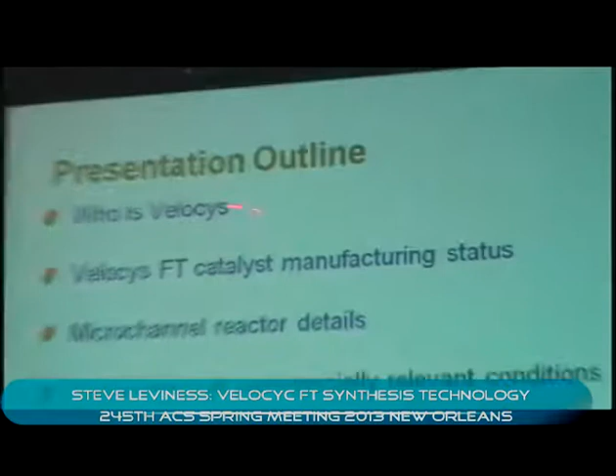On the outline, I'd like to talk about who Velocys is. There's been some confusion about who we are and what we do. I'm going to turn the presentation kind of backwards from the way it often goes and talk about our FT catalyst manufacturing status up front. A little bit on the microchannel reactor details, although again here I'm going to focus on the catalyst. Quite a bit of information about performance at commercially relevant conditions and performance scale-up, and some data and discussion of catalyst regeneration and poisoning, and finish with the catalyst composition and manufacturing.

At that point, I was going to apologize that I will not be able to show any detailed characterization data, which we do have, but I was not allowed to show it. However, after this morning, I would just have to say that my friends at Sasol and Exxon have already shown that data. So thank you very much. Yeah, got me out of that line.

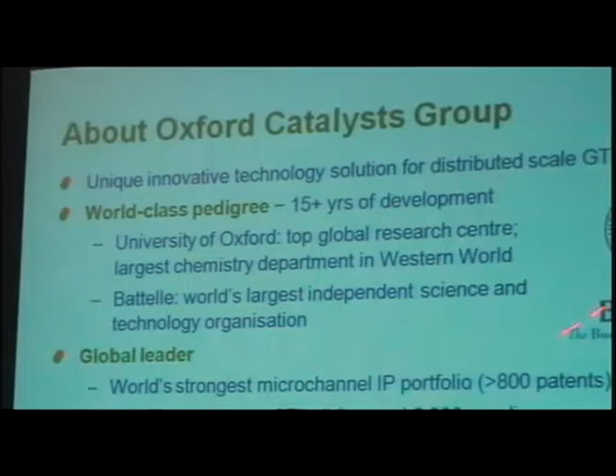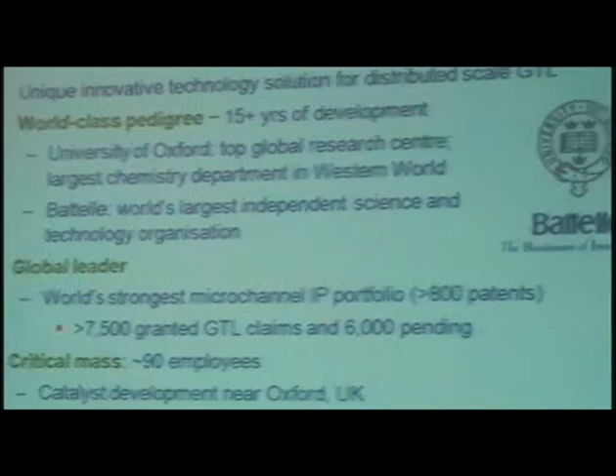Okay, Oxford Catalyst Group. It's really two companies originally. Oxford Catalyst was spun out of Malcolm Green's lab at the University of Oxford, which is the top global research center, the largest chemistry department in the West. Velocys was spun out of Battelle in the Pacific Northwest National Labs. Battelle is the world's largest independent science and technology organization. The catalyst technology came from Oxford, the microchannel reactors from Battelle. We have a tremendous amount of IP in microchannels, showing 7,500 granted claims, 6,000 pending. I'm still trying to get us to update how many of those are independent claims. As you know, there can be claim inflation, but we have a lot.

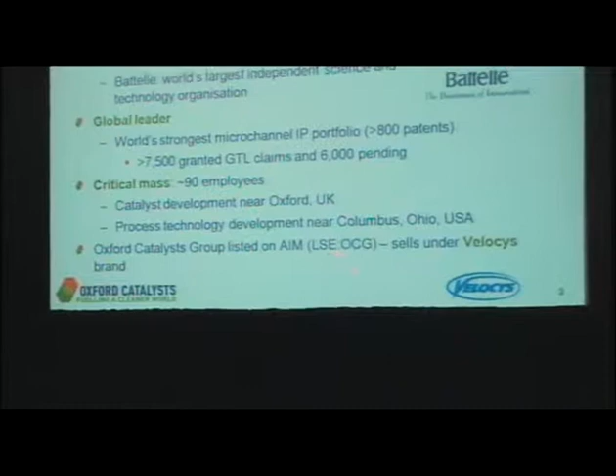We've got about 90 employees now. Our catalyst development group is still in the UK near Oxford, and the majority of our employees are near Columbus, Ohio, which is a pretty silly place to be when you're in the energy industry, but that is where Battelle's headquarters is, so that's how we got there. We are listed on the London AIM market as Oxford Catalyst Group, OCG, although most of our publicity and announcements are under the Velocys brand, and we are actually consolidating the name to Velocys a little later this year.

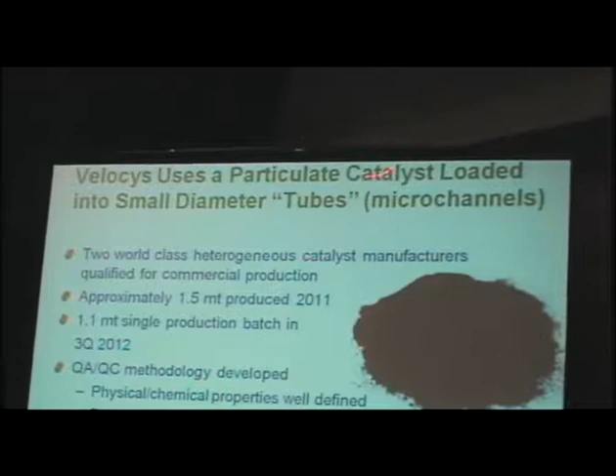Okay, so the catalyst. There's been a little confusion because we've changed over the years, but this is what it is. It is a particulate catalyst. It's a powder. It's bigger than a slurry catalyst particle distribution. It's smaller than a standard fixed bed catalyst. And it is directly loaded into small diameter column tubes, microchannels.

Typical screens on the top and bottom, catalyst stays in the reactor, but it's also very easy to change out, quite a bit handier than wall coatings and issues like that.

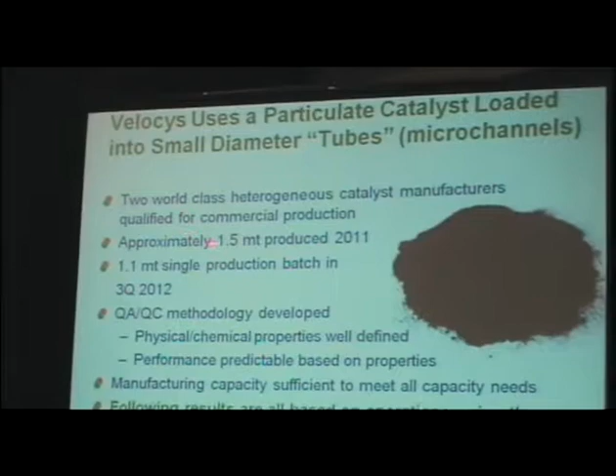We have two world-class catalyst manufacturers qualified for manufacture. One made about 1.5 metric tons in 2011, and the other made a single 1.1 metric ton batch last year. We've developed QA/QC, defined physical chemical properties, and can predict performance based on property and characterization measurements.

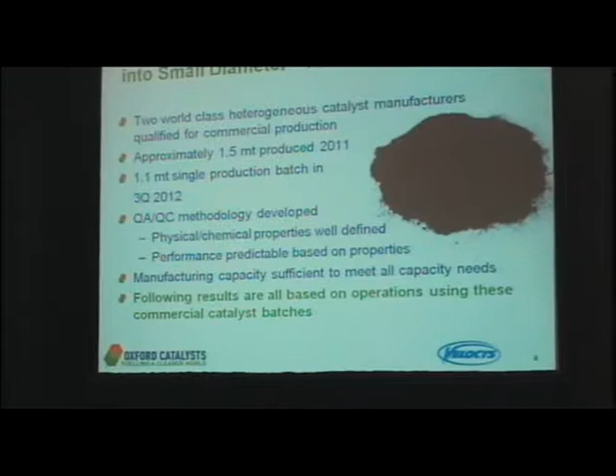That capacity now is sufficient to meet all the needs we've looked at for potential commercial plants. Importantly, the results I'm going to talk about here are all based on operations using these commercial catalysts. This isn't a one-off in the lab or anything like that. So, Sue, to get to your point from earlier, yes, they can be manufactured, though you may have to go through a few rounds of scale-up to get over issues and concerns.

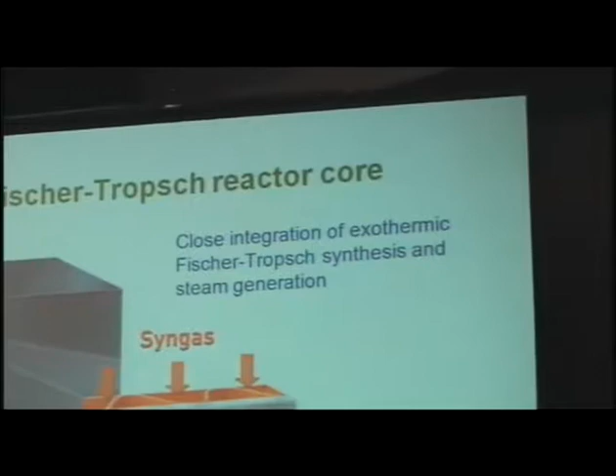Okay, the reactor - this is what we call the reactor core, with alternating plates. There is a coolant plate, cross flow, and that is boiler feed water, and we are generating steam. Downflow, there are gaps that the catalyst is poured into. So syngas flows down, coolant flows across.

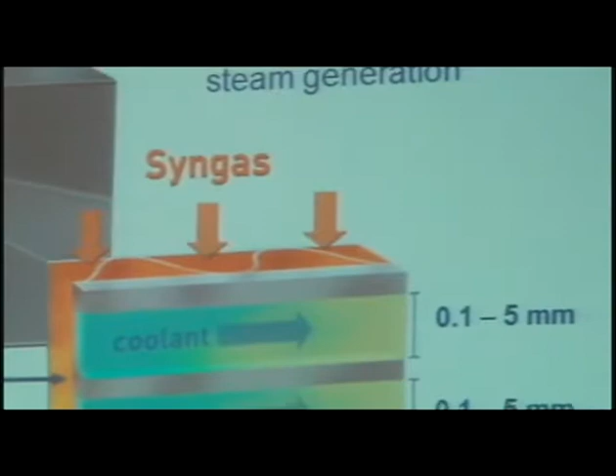Characteristic dimensions are in the range of 0.1 to 5 millimeters. The smaller end is on the coolant side. The process side is a little larger.

Here are some reactors. This is a half barrel a day. It's actually about the size of a pizza box. It's inside a pressure containment shell that we ran with a client in Austria in 2010.

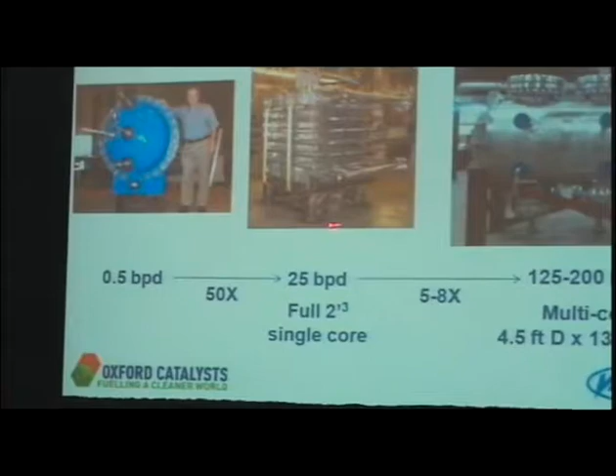This is a 2-foot cube core with a pressure housing around it. That's nominally about 25 barrels a day. And to put it in perspective, that 2-foot cube core at normal operating temperatures will generate between 400 and 500 kilowatts, almost half a megawatt of energy release as steam.

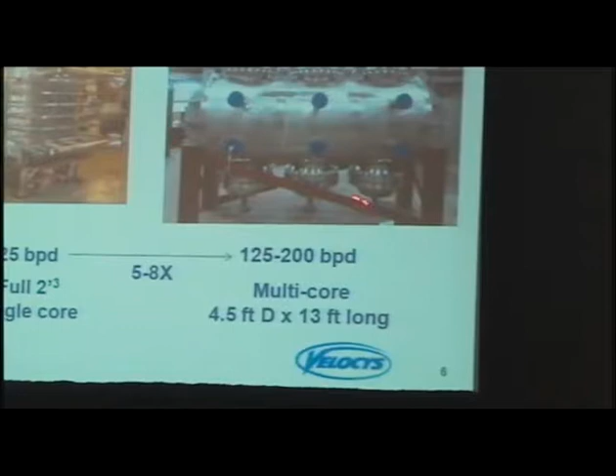This reactor here is a larger one. It's just stacked larger inside a cylindrical pressure containment vessel. This would normally be about 150 barrels a day at standard conditions. It's 4.5 feet in diameter and 13 feet long. I've had a 150 barrel a day reactor in my career before that I climbed inside and was lowered down on ropes, so it's a little different concept.

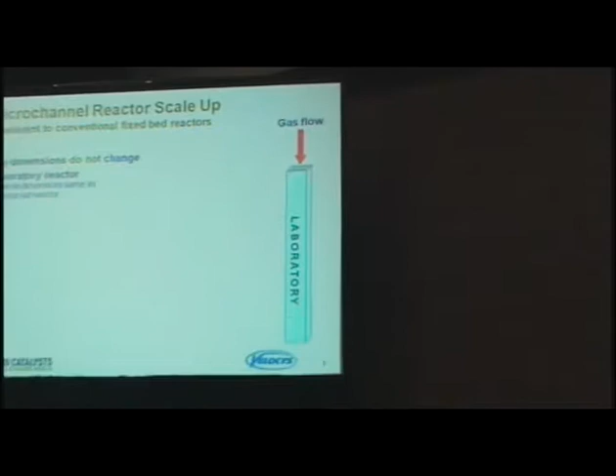So for scale up, this looks very much like a traditional or conventional multi-tubular fixed bed system. The key dimensions don't change. In the lab, we run single microchannels that are the full length - 24 inches long, with exactly the same dimensions as the microchannels in the reactor.

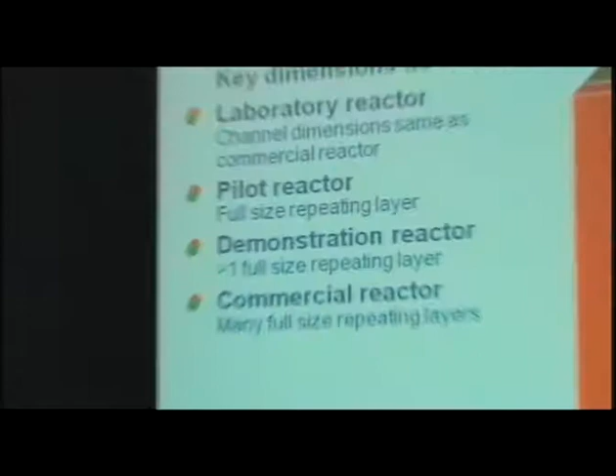We go to a pilot reactor, we add more of them across a single plate. We go to a demonstration reactor, we have more plates. And for a commercial reactor, just even more. But the concept is exactly the same as a conventional fixed bed - gas distribution by pressure drop, and just increasing the number of tubes.

All the parts are the same. The micro-macro interface ensures consistent results at these different scales - it's simply numbering up.

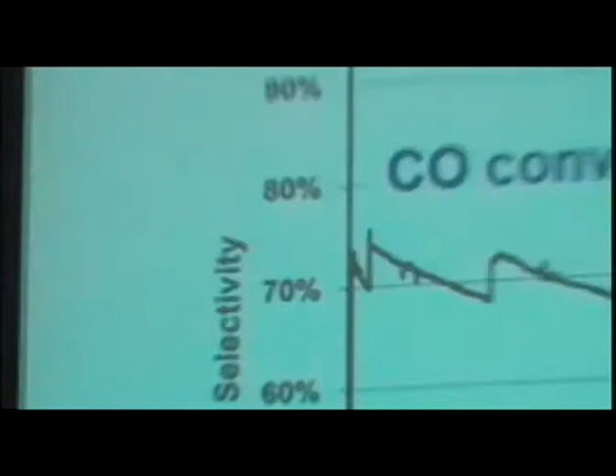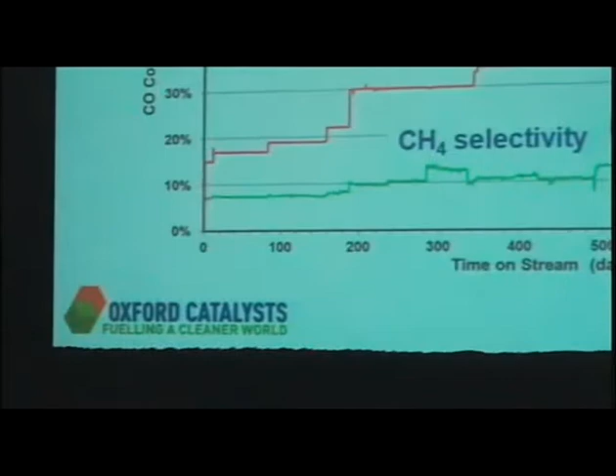All right, this particular graph - I showed an earlier version of this about a year ago. Some of you were there at the Syngas conference in South Africa. This is CO conversion here at the top, reactor temperatures in red, and methane selectivity in green. This is very similar to the data Kim was showing, except again, I have the numbers on mine. We're increasing temperature to hold conversion more or less steady, and we were doing a lot of product collection and analysis at each of these periods.

One important note - if you see right here, there's kind of a plummet in conversion and then a sharp rise in temperature. We had a trap failure in the lab. People often talk about clean cylinder gas - well, if you have 3,500 pound CO, it's not clean when it comes into your facility, and if your trap fails, you get carbonyls. So over on the bottom here, this is time on stream, and this is in days - not hours.

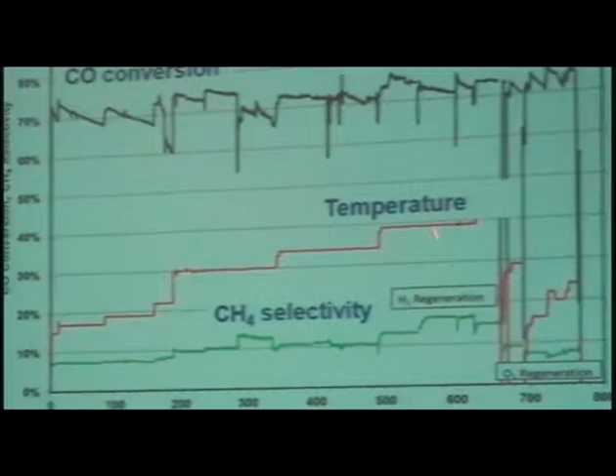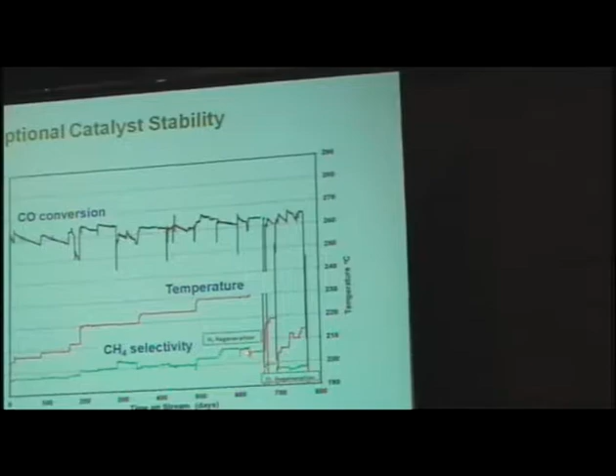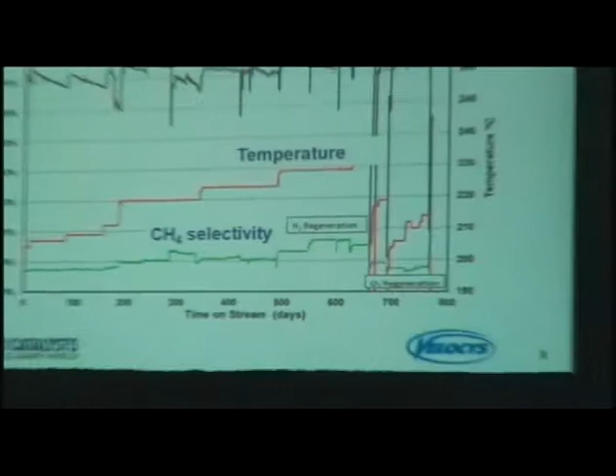Late last year, we did a hydrogen re-reduction, and typically that will recover about half of your activity. We heard some discussion of that this morning. A little while later, we did a full redox, a standard wax removal, oxidation, re-reduction. I'll show you the data, but we actually came back at a slightly higher activity here two years later than when we first started this up in January 2011.

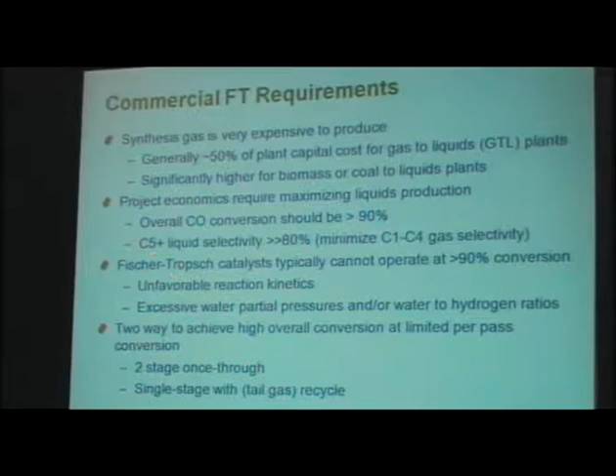One thing about this kind of data is it's not economic. You can't just run a single stage at 70% conversion - it's kind of meaningless because your syngas plant or XTL plant would never be economic. Syngas is really expensive to produce, generally about 50% of plant capital for gas-to-liquid plants, and it can be a lot more for coal or bio. So project economics require maximum liquid production, typically overall CO conversion more than 90%, and C5 plus liquids minimum 80, but should be quite a bit higher, which means you want to minimize light gas selectivity.

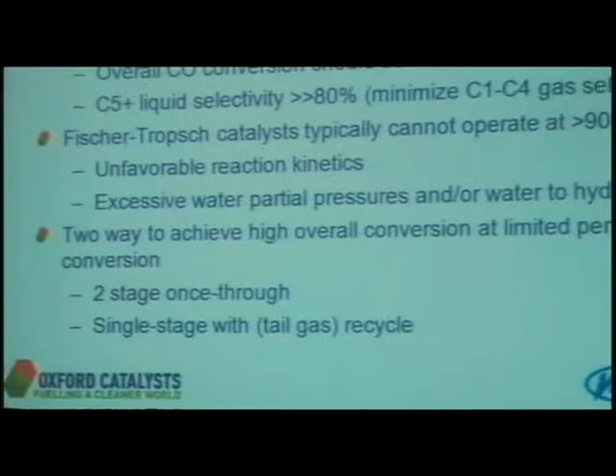I think we all know that just about zero cobalt-based FT catalysts can run at over 90% conversion. There's kinetic issues with getting there, and there's also activity maintenance issues with staying there. So there are two ways to do it. Kim mentioned these earlier - you can run a two-stage or even three-stage system through, or a single stage with tail gas recycle.

Just to look at those briefly: syngas in an FT reactor, you've got a couple coolers, 3-phase separators. You may or may not recompress here. Then you go to another second stage FT reactor, cool down, knock out product again. Then you have a tail gas purge from the FT unit that will typically go to a combination of fuel and some recycle to syngas generation like an ATR or SMR.

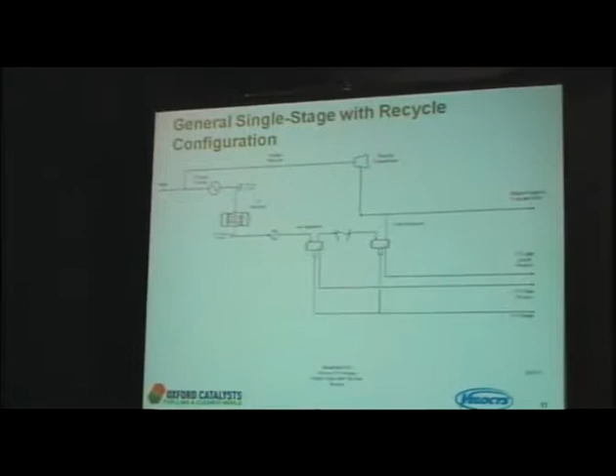Single stage with recycle is just what it sounds like. You have an FT reactor, some separation, and then when the tail gas comes off, a significant fraction of that is recycled back to the feed. It's a way of achieving high overall conversion on fresh syngas while limiting the per pass conversion in the reactor. Typically when you're at relatively low inerts, certainly below about 20-25% non-hydrogen CO, usually the single stage with recycle will be the more economic choice.

Just a couple details there. The recycle ratio is really set by the difference between your per pass and your overall conversion. So here I'm targeting 91.5%. If we can run 74% per pass, which is our current design, we have a recycle to fresh feed ratio of a little bit over 0.4, and about 30% inerts on feed, starting with a standard 10% inert ATR kind of gas. If we could only run 60% conversion per pass, we'd have a recycle to fresh feed ratio higher than 1, and we'd have almost 40% inerts on feed. That's just the way it works.

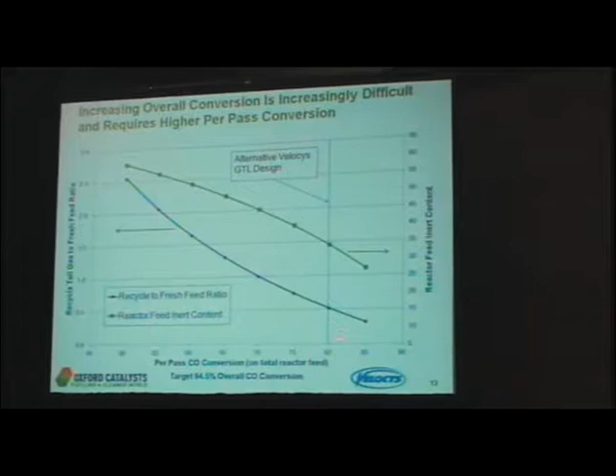And if we try to go to even higher conversion, in this case 94.5, similar kind of thing. Now, we've looked at a design with 80% per pass conversion, and there we need a 0.5 recycle ratio and 35% inerts. But if you could only run at 60%, you'd have over 1.5 parts of recycled tail gas to feed. What that does is it backs feed out of your reactor, and you need more reactors. So there's a significant economic implication of the per pass conversion you can operate at.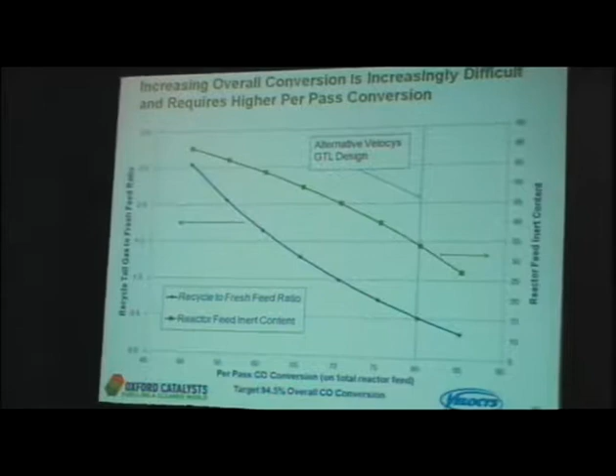The data I'm showing here is from a laboratory single channel reactor. We feed carbon monoxide and hydrogen separately, use nitrogen as inerts. Although the large reactors are cooled generating water, we actually use a hot oil loop, so it's a little worse heat transfer in the lab. And then we have a number of knockouts, online GC, tail gas meter, etc., for the material balance to collect products.

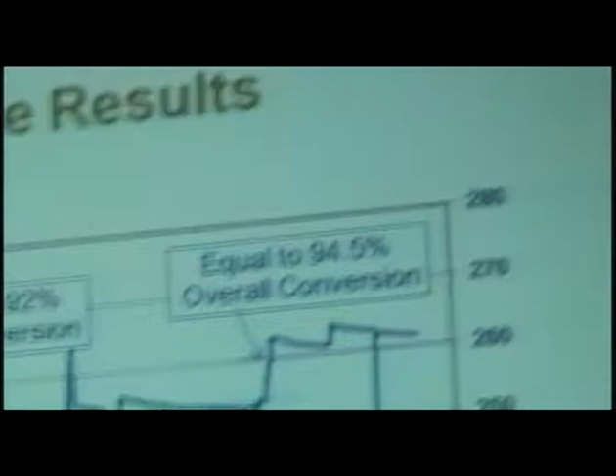This is a run I started last year, right around the time of the South African convention, and we are simulating the single stage with recycle, calculating what the feed would be at 91.5% total conversion and 74% per pass. We're targeting to keep the conversion at 74 or above. The blue line here was for this condition, equivalent to 91 to 92% overall, and you see we're doing that regularly. Over the last couple of months, just for grins, because we're still finding out what this catalyst will do, we took this up into the low 80s.

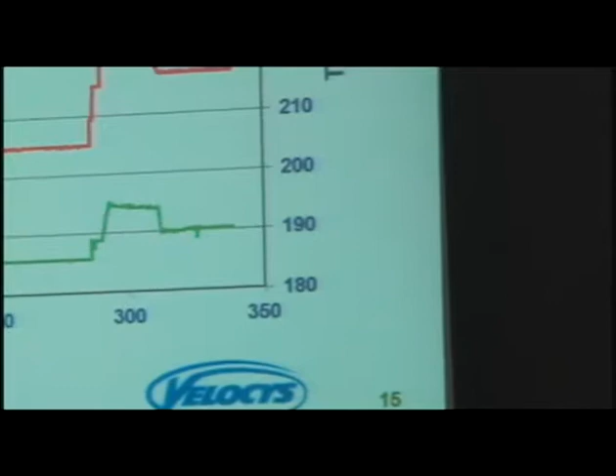Again, this is time on stream in days, so these periods are, in many cases, 30 or 40 days. We're losing 1 or 2, maybe 3% conversion in there. Another one - we lost cooling on the weekend here at about day 50, and the feed did not shut off. The reactor got really hot, as you might imagine any FT reactor will. It was hurt pretty badly. We regenerated this at that time as well, and we actually started up at a higher activity after that than we had initially, and I think you'd agree that the maintenance since then has been pretty good.

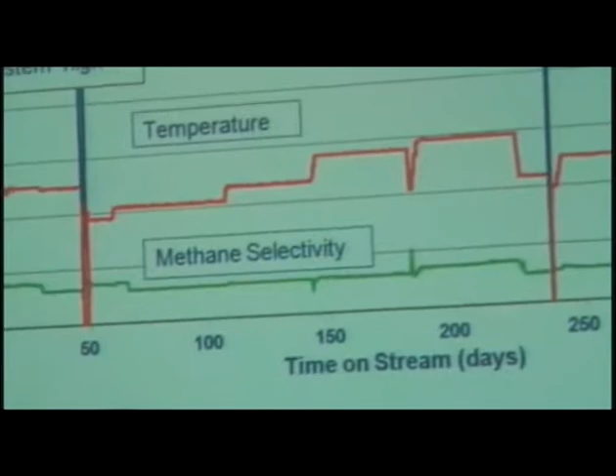That effect is more than likely redispersion through oxidation. It's been observed before - I know Sasol has reported on that, and I believe Shell has as well.

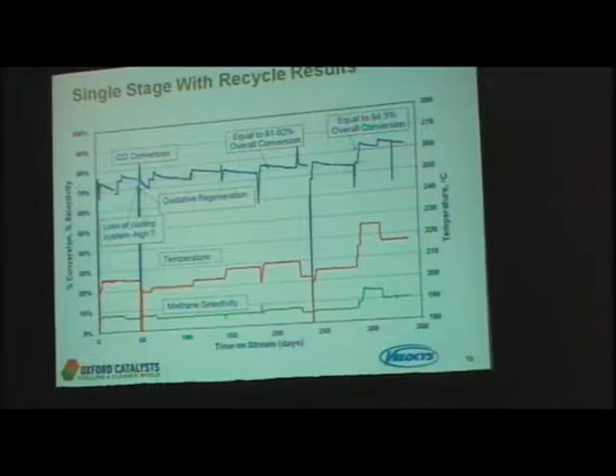Now looking at these conditions, that's pretty high conversion to start with. But the other important thing is we're running substoichiometric feed gas. This is equivalent to a fresh syngas ratio of 2.0, so the reactor feed is actually in the range of 1.75 to 1.85 hydrogen per CO. That means it goes down drastically when we're running such high conversion, and we keep stepping on this.

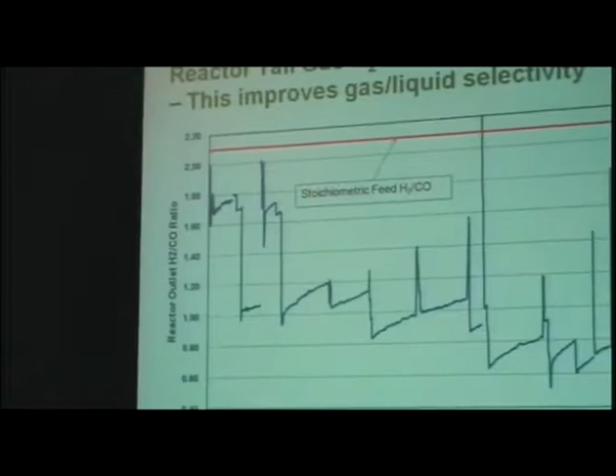So this is what our tail gas hydrogen to CO ratio looks like during that run. This would be if we had completely stoichiometric feed - 2.1 in, 2.1 out. We're actually down here at the 0.6 to 0.8 range, which is a little bit counter to the usual teachings about cobalt catalysts. It's never been as bad as my friends at Rentech will tell you - that you have to run 2.1 - but I'm a little surprised at how well this runs with these very low ratios.

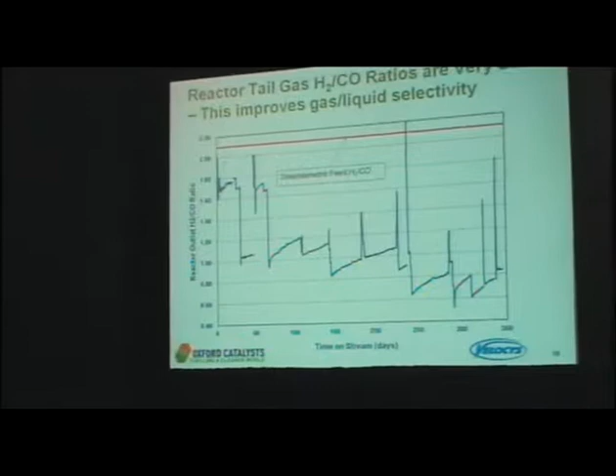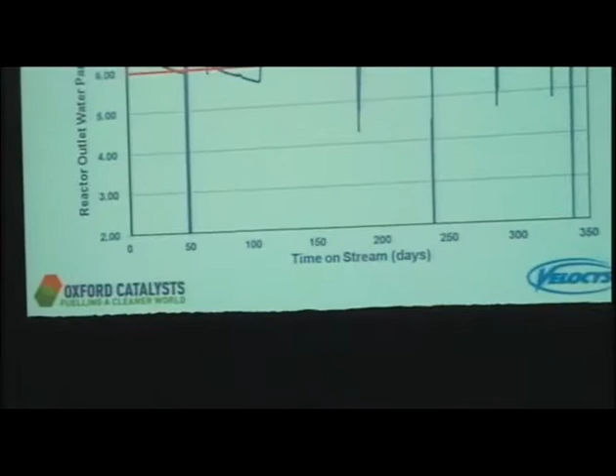Combining the two, another parameter people worry about is the water to hydrogen ratio. Because we're running spectacularly high water partial pressures at sub-stoichiometric conditions, in these last periods we're up at 6 to 7 to 1 water to hydrogen. It does look like it's coming down very fast because it's two effects combined - the water drops as conversion comes down and the hydrogen goes up, so this is kind of amplifying the conversion changes. This is what it would be, again, if you had stoichiometric feed - about 1.5 at 70% conversion. So we're operating way over that.

Just a couple of highlights I'd like to point out. GHSV, this is gas hourly space velocity - total feed volume, standard basis, per volume of catalyst per hour - is typically in the 11 to 12,000 range. Catalyst productivity on a volumetric basis is in the range of 1,700 on the low side to 2,500 or higher, and productivities tend to range from, in this case the high conversion is a little low, but 0.9 to as much as 1.5 grams of C5 plus per gram per hour.

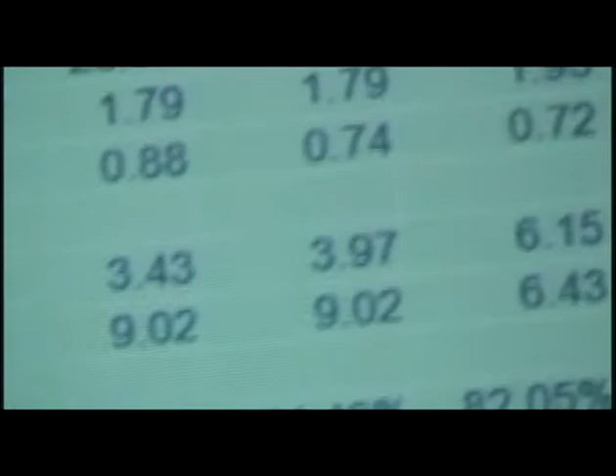Selectivities - as I mentioned, the target, we'd like to be in the high 80s, and we've got a lot of data here in the 88, 89, 90 range. The high conversion case gets hurt, so I'm not really sure how attractive that's going to be economically, but we need to do this in order to get the data.

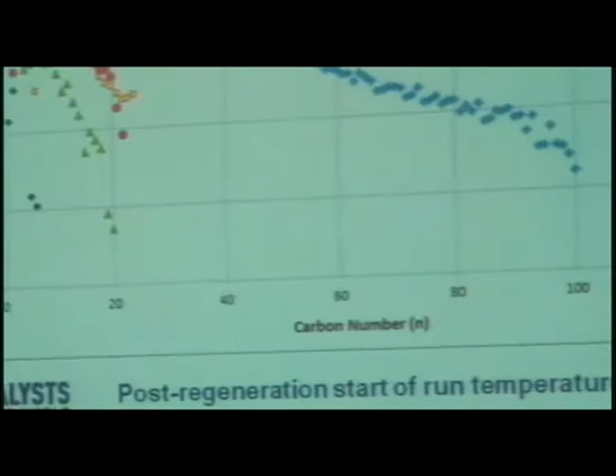I mentioned we collect a lot of product samples, both hydrocarbons and water, for characterization. So here's a result of one - it's a low temperature operation after the regeneration on that previous run. These are paraffins in blue, olefins in red, isoparaffins in yellow, alcohols in green, and acids also shown. Fairly standard kind of behavior. The alpha is pretty high here.

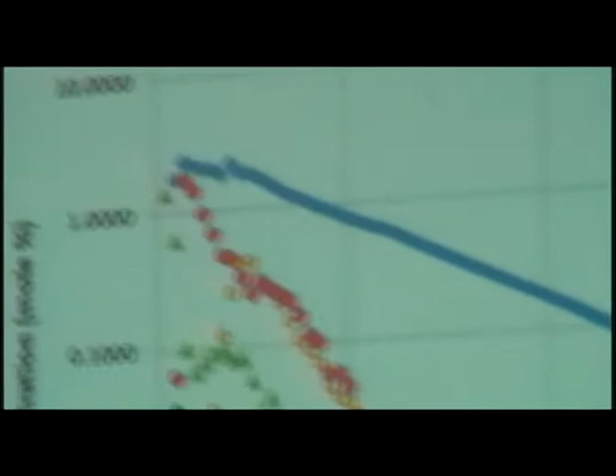It's about 0.93. One interesting thing - despite the high alpha, the olefin to paraffin ratio is below 1 at all carbon numbers, even C3 or C4, and I'm not sure I've ever seen that before on any other catalyst system. Typically my experience has been if you're getting a high alpha, you have an olefin to paraffin ratio of 2, 3, or 4 in the LPG. I think that has quite a bit to do with the conditions we operate at. The total olefins and alcohols are pretty low for cobalt catalysts - an order of magnitude lower - we're maybe in the range of 5% non-paraffin products.

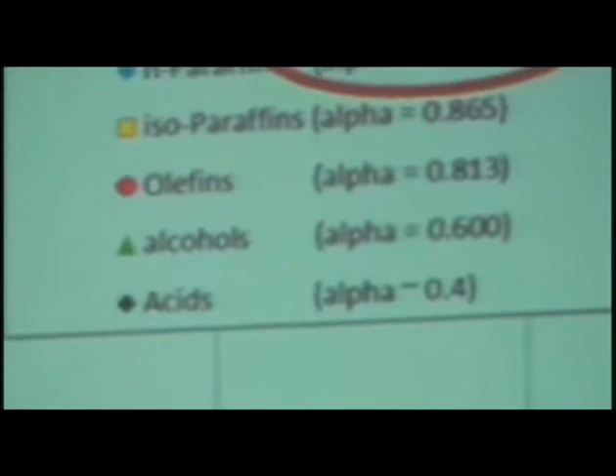As you go up in temperature, alpha goes down a little bit. At 210, it's about 0.9, same kind of behavior - olefin to paraffin ratios are below 1 at all occasions, and the predominant products are paraffin.

I should note, Kim mentioned some of his outside business - Emerging Fuels actually conducted these analyses for me, so we're not cooking the books or anything like that. This is Kim's analytical data.

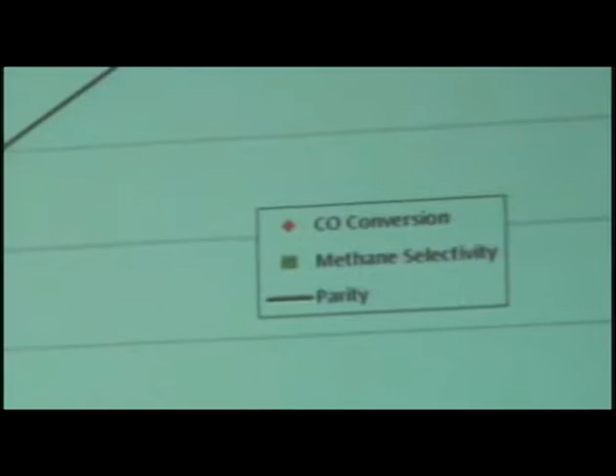Last year we ran one of those 2-foot cube reactors at a client site. I'm still not allowed to say where, who, or what, or anything else. Let's just say the syngas composition was very different from what we normally run, so I can't show the data based on our standard conditions.

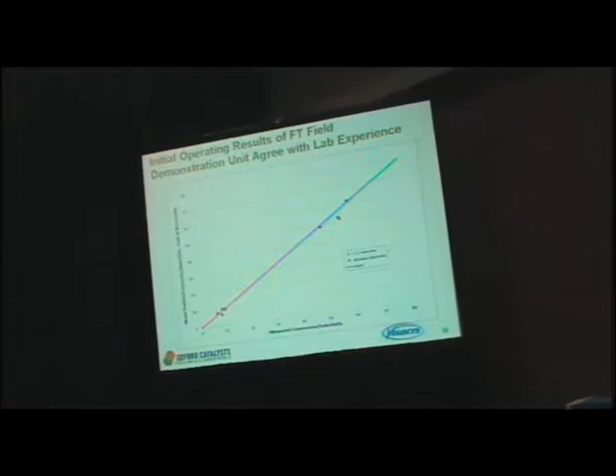We've spent a lot of time developing a kinetic model over a wide range of conditions. This shows, over a period of 20 days of long time averages, what we measured for conversion and methane selectivity versus what the model predicted, assuming 100% of our lab activity in that reactor. As you see, we're pretty much right on it, or within the scatter of the uncertainty of the data. We're very pleased with this. This was activated under industrial conditions: recycled hydrogen, desiccant dryer, very low hydrogen makeup rate.

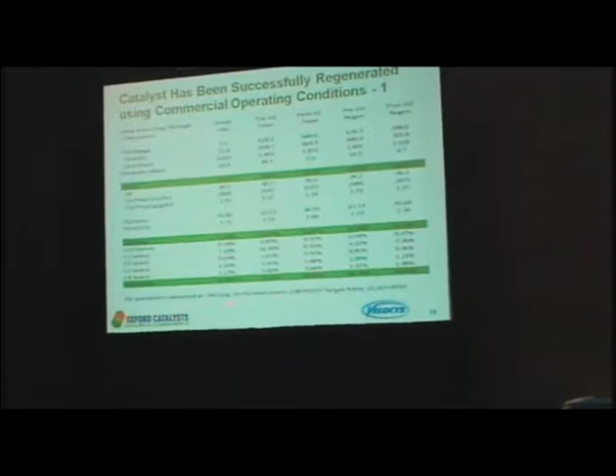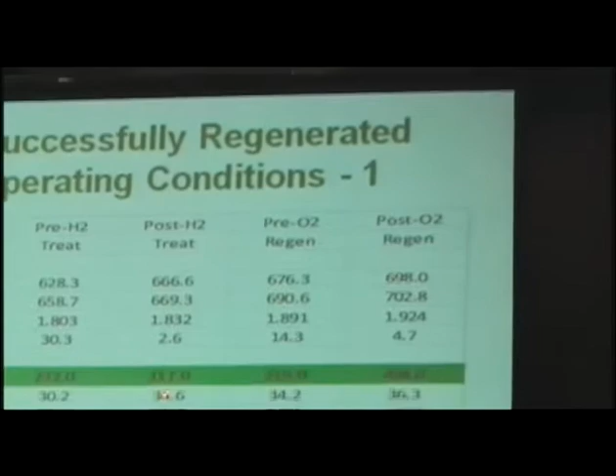Regeneration - I mentioned that really long-term run. We started up with all the same operating conditions, standard 12,400 GHSV, the rest are listed. 205 to get 71% conversion initially, this is in January 2011. Before we did a re-reduction hydrogen treat, we were up to 232 to get the same kind of conversion. After that, we got down to 217, and we ran a little bit so there was some deactivation back up to 218. We did the oxidative regeneration, and we came back to slightly higher conversion at 1 degree lower temperature, at 1.92 years on stream. So we're pretty happy with that.

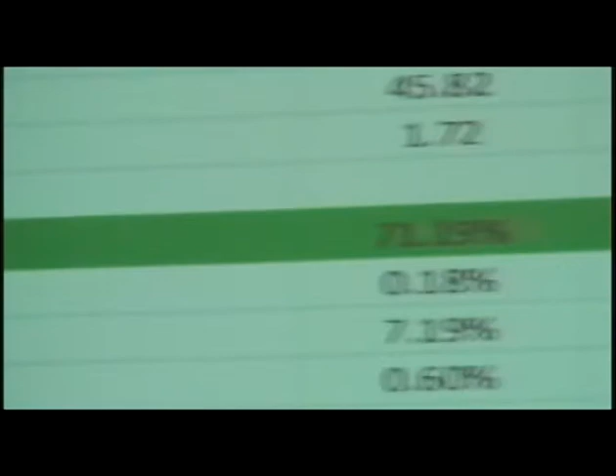One thing that does stand out different is if you look at the CO2 selectivity - since there's none in the feed, it's very easy and accurate to measure. At the same conditions, we've got about twice the CO2 selectivity, which I think supports the iron carbonyl breakthrough in that earlier event.

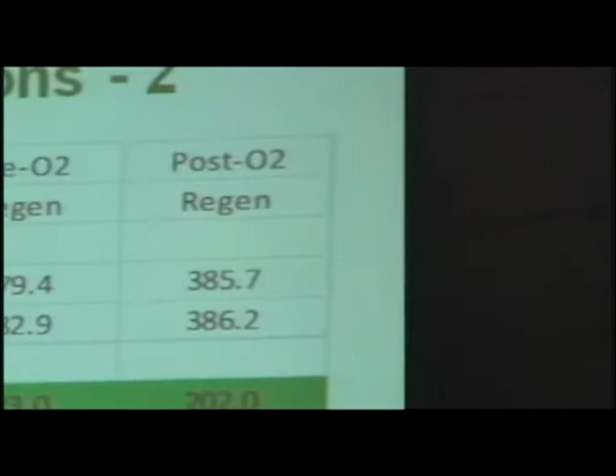We did another long-term study for this reaction kinetic model, and we really beat this catalyst up. We ran all kinds of stupid conditions all over, and it was pretty badly hurt. After about 300 days, we were up to 226, again at standard conditions. The re-reduction got us down to 214, and then we repeated the kinetics again on the post-regeneration sample, looking to see if there were any changes. There weren't. And then we ended up about 223.

We did the oxidative regen, and lo and behold, we come back 5 degrees higher activity at the same conditions after a little more than a year on stream.

Similarly, in a real plant, who knows - with upsets and regular regenerations, you may have to do, over a catalyst life cycle, 5 or 10 different procedures, and it's very much possible to do a regeneration wrong. You can kill the activity, or you can get the activity back and destabilize the catalyst. So it's really important to show that you're not gradually doing harm just with your procedure alone, such that after you've done it 3 or 4 times, the catalyst isn't performing anymore.

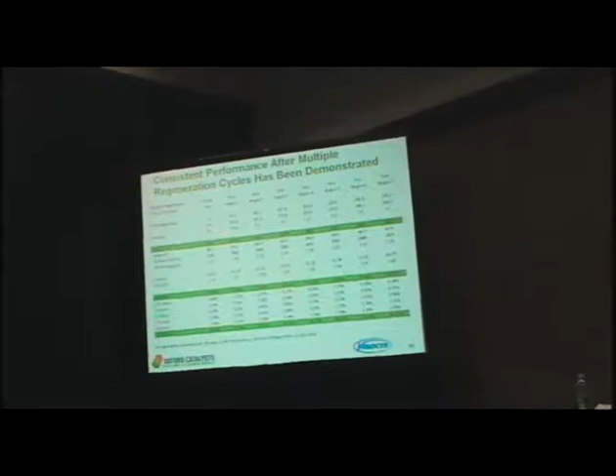So instead of running for a year or 2 in between each regeneration and taking 10 years to do these studies, what I've been doing is we did go well over 100 days the first time, again with some kinetic work, and then holding shorter periods in between, but just repeating the procedure.

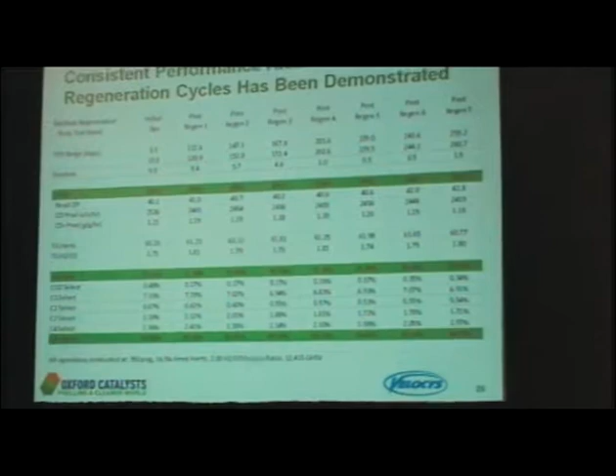With the lower temperature, we do get a little higher C5 plus selectivity, but I don't see anything more significant than that.

People have often said, well, your feed rates are so high at 12,000 GHSV, if you've got contaminants, you're going to deactivate a lot faster than any other reactor. And that's a valid concern. So another thing that we've done is look at contamination. While we're just starting to look at contamination, funding issues and management priorities delayed me a bit.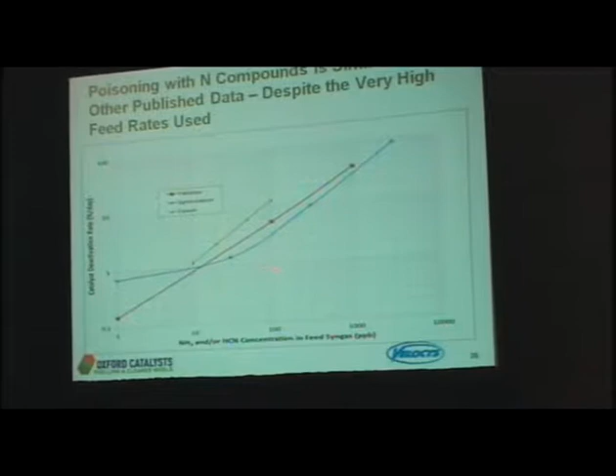These are results from ammonia addition. Now, unfortunately, I cannot specify these as a total ammonia addition rate because of comparable data - I do not know the GHSVs. Or, well, I take that back - I do know them, but I'm not allowed to say them. So this is publicly available information, and I've just plotted it on concentration of ammonia in the feed.

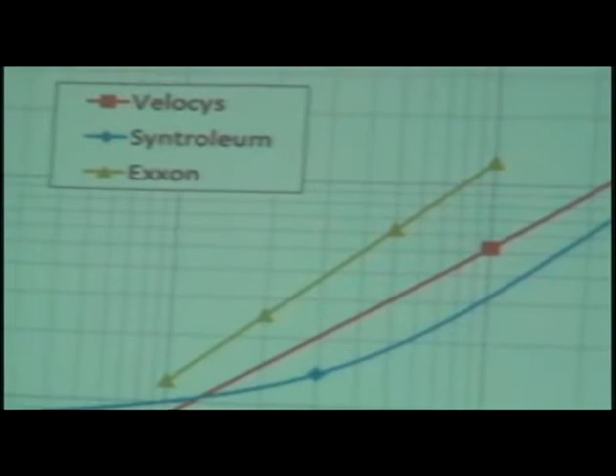From Exxon, there's a patent that came out in the late 90s. We get a deactivation rate of a little over 10% per day at 100 ppb, and a little over 1% at 10. Syntroleum - in fact, I had presented this at a symposium honoring Cal Bartholomew about 6 or 7 years ago in Boston - is quite a bit lower, but not orders of magnitude different. And our data, which is just over the last several months, is kind of in between the two.

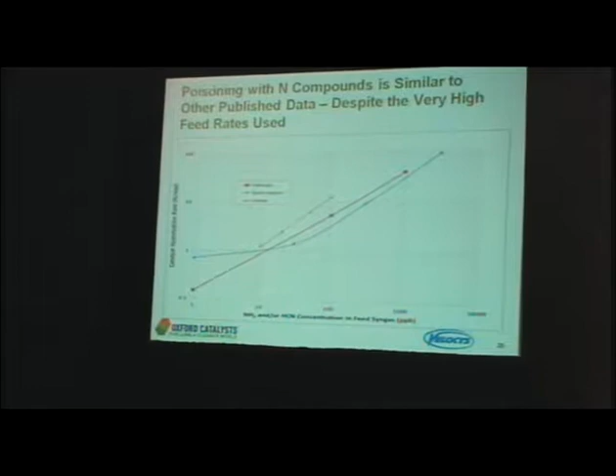So, yeah, ammonia is a poison, but even though we're running 12,000 GHSV, it doesn't seem to affect us any differently than these other technologies did at lower feed rates. I think it's really more active site dependent than anything else.

Am I running out of time? Okay, I'm just about done.

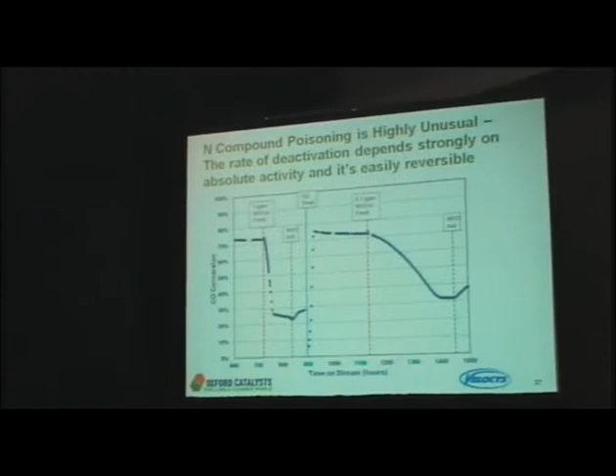I'd just like to comment here, because besides that published data, about the only other data I know that's out there, PERC did a DOE study a couple years ago. And surprisingly, he found that when he added ammonia with cobalt catalyst, it didn't do anything. Now, I've worked with a lot of different ones, and I've never seen that happen.

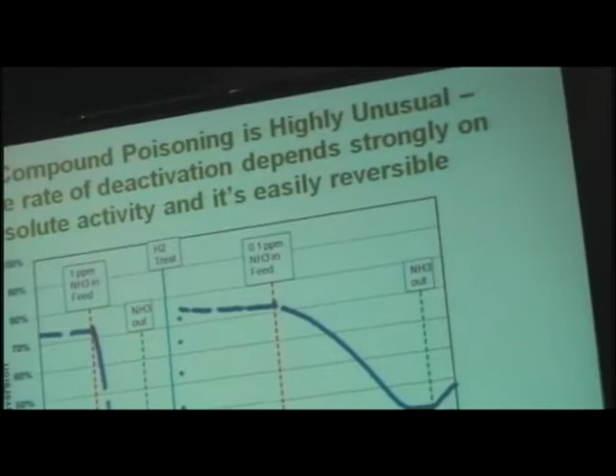Now, this is a detail to what we did. We put in 1 ppm, and you see it plummet. But it always stops at some level, even with the ammonia in. And if you take it out, it slowly starts to reactivate. We actually did a hydrogen treatment here because we didn't want to wait forever. We reversed all of that deactivation.

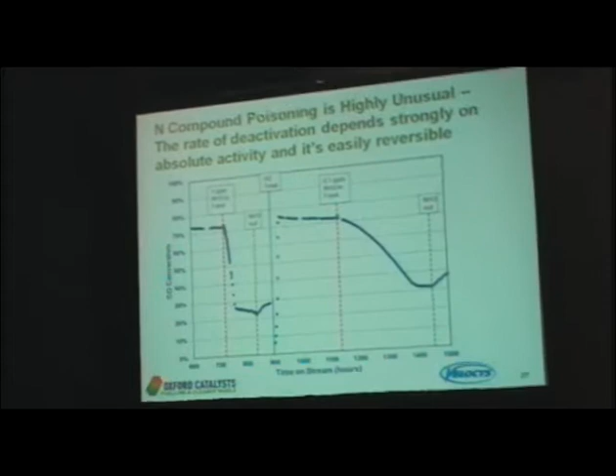Now we put 0.1 in, it deactivates slower, and it stops at a higher level. And if you take it out, it starts coming back up. I have seen cases where we had a catalyst that did not respond to ammonia in the field, but we knew that it was lower than expected activity because we had run it elsewhere. And once we got the expected activity, then lo and behold, it started getting poisoned. I don't know what magic you had in that system, Bert, but I've never seen anything except a fully poisoned catalyst not respond to ammonia or cyanide.

We do plan to continue with other ones, importantly sulfur and other species which will often be in the gas, doing similar kind of studies to nail this down as well.

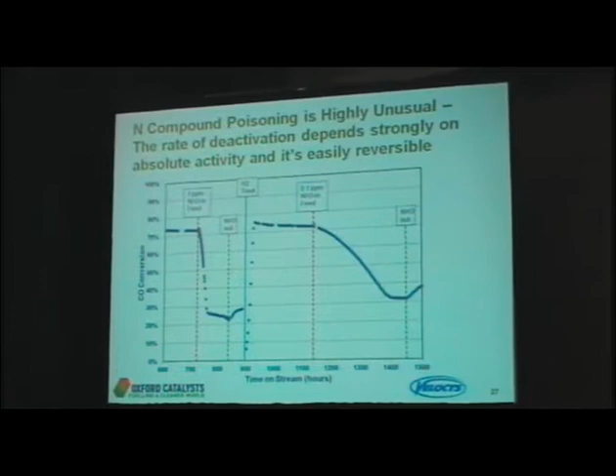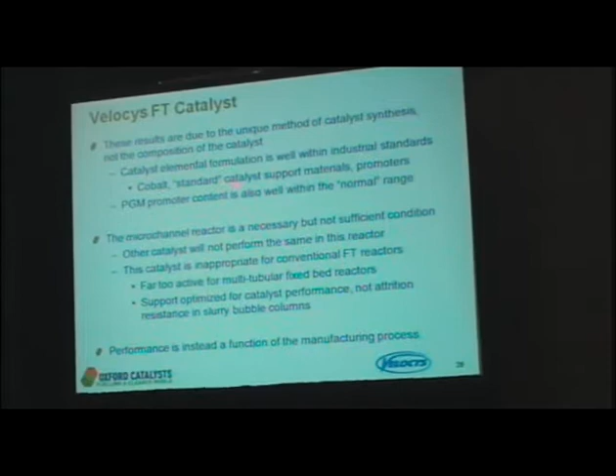So last, to just finish up, these results are due to the unique method of catalyst synthesis, not the composition. Okay, if you took our catalyst and did an elemental analysis, it's well within the industrial standards. Nothing would really stand out. Cobalt, standard catalyst support materials, promoters, and PGM promoter content, well within the normal ranges that we've heard about the last couple of days.

The microchannel reactor is necessary but not sufficient. You could put another catalyst in this reactor, but it wouldn't pay because the reactor is expensive per unit volume. But the catalyst, if you put it in a conventional FT tubular bed, it's going to melt down immediately. And as soon as you put syngas in, it's all over.

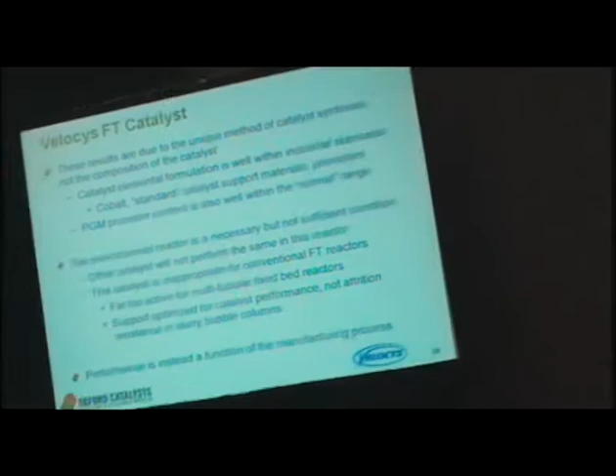And the support is optimized for catalyst performance, not attrition resistance. So if we put this in a slurry bubble column, I'm sure the filters wouldn't like it at all. We could probably make this catalyst on an appropriate support, but that's not the support we're working with now. And it's really the manufacturing. We've published this before. We call it the organic matrix combustion method.

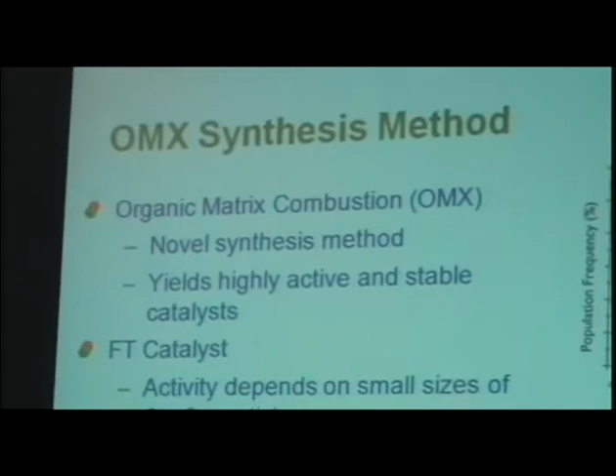Stu was somewhat close earlier today. But there is an organic matrix, and we get a smaller and tighter cobalt particle size distribution. And within certain parameters, we can actually minimize the deactivation rate through controlling that parameter as well.

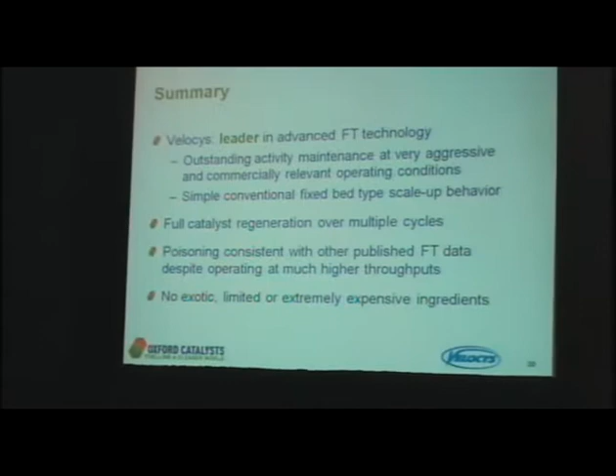There are other things that also influence deactivation. So I think that's about it that I wanted to say. I think we're a leader in advanced FT technology. We've got outstanding maintenance at very aggressive and commercially relevant conditions, and it's a simple, conventional fixed bed type scale-up. We've regenerated over multiple cycles. Poisoning is consistent with published data. And we really don't have any exotic, limited, or extremely expensive ingredients in the catalyst.

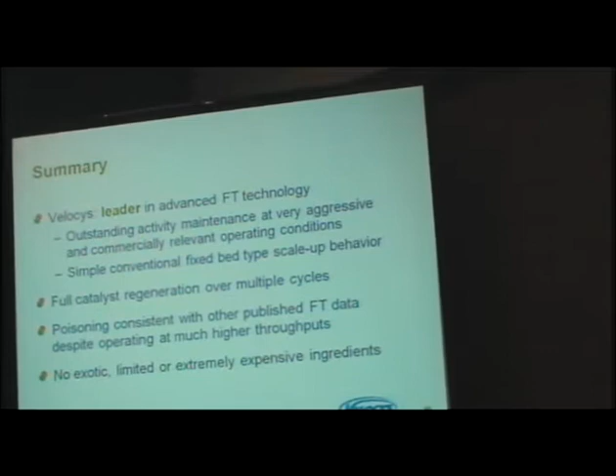No, the ammonia we did, you're right, it was at the end of a run. It was aged. We've since run with fresh catalyst and get the same curve you do. You do? Yes. Oh, all right. I'm glad to hear that. If you had a magic way of stopping it, I'd want to know about that. No, just aged catalyst. Okay. Anybody else? Question or comment?

Thanks, Steve. Oh, we got one in the back. Yeah, I got one question. I mean, you showed very beautifully the concept of the reactor and the catalyst. So, what's the business model?

Our business model is we are looking to supply catalyst and reactors and licenses. So we've announced a couple of plants that are in serious consideration. The Solena Green Sky, it's a municipal solid waste to aviation fuel project in London. Green Sky, that's right. And then there's a Calumet Specialty Products small plant in Karns City, Pennsylvania, that's currently in engineering review. So we're not manufacturing catalysts or hardware. We're designing them, validating them, and working with partners in the manufacture. And we would be supplying the catalyst, the reactor hardware, and the licensed operator.